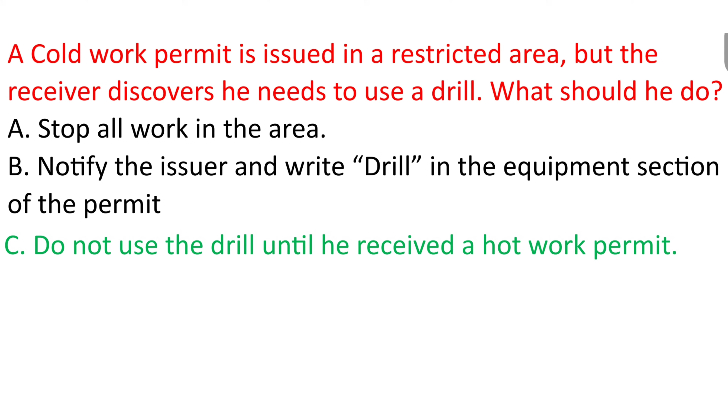Question: a cold work permit is issued in a restricted area, but the receiver discovers he needs to use a drill. What should he do? A. Stop all work in the area. B. Notify the issuer and write drill in the equipment section of the permit. C. Do not use the drill until he receives a hot work permit. Answer: C. Do not use the drill until he receives a hot work permit.

Question: what is a reason for purging? A. Remove non-hazardous materials. B. Clean the line of sludge buildup. C. Remove residual hazardous materials. Answer: C. Remove residual hazardous materials.

Question: when would a receiver need both a hot work and confined space entry permit? A. Working near steam lines. B. Grinding in a storage tank. C. Excavation with a backhoe. D. Driving into a restricted area. Answer: B. Grinding in a storage tank.

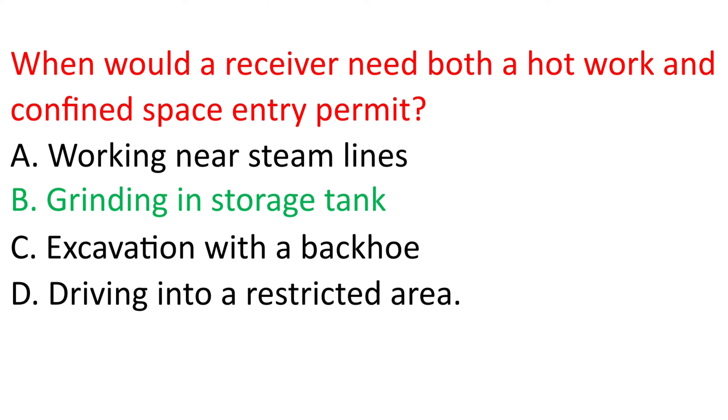Question: welding in a 6 feet excavation, welding in a tank, would require which work permits to be issued? A. Release and confined space entry. B. Hot work and confined space entry. C. Cold work and confined space entry. D. Hot, cold and confined space entry. Answer: B. Hot work and confined space entry.

Question: in what order is a hydrocarbon vessel prepared for an EO/LB? A. Gas test, drain, clean, isolate, ventilate, purge. B. Gas test, isolate, drain, purge, clean, ventilate. C. Drain, isolate, purge, clean, ventilate, gas test. Answer: C. Drain, isolate, purge, clean, ventilate, gas test.

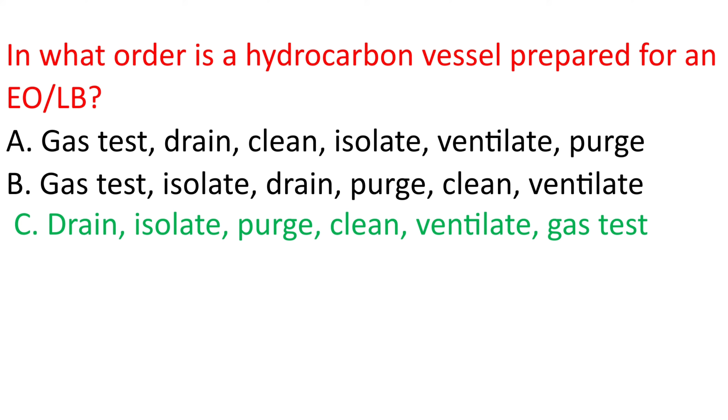Question: in what one way can an issuer inform the workers about hazards in the work site? A. Assign a fire watch. B. Use portable radio. C. Install warning signs. D. Tell the gas tester. Answer: C. Install warning signs.

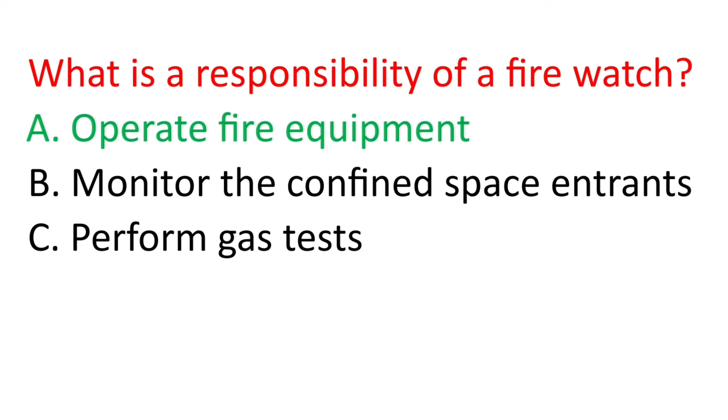Question: what is a responsibility of a fire watch? A. Operate fire equipment. B. Monitor the confined space entrants. C. Perform gas tests. Answer: A. Operate fire equipment.

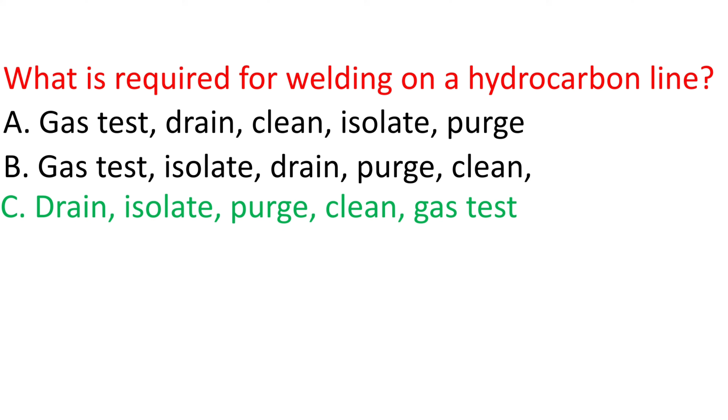Question: what is required for welding on a hydrocarbon line? A. Gas test, drain, clean, isolate, purge. B. Gas test, isolate, drain, purge, clean. C. Drain, isolate, purge, clean, gas test. Answer: C. Drain, isolate, purge, clean, gas test.

Question: why does an issuer ensure that all energy sources have been properly locked out, tagged and de-energized? A. Prevent financial loss of product and power. B. To protect receivers from injury. C. Prevent unexpected exposure to hazardous gases. Answer: C. Prevent unexpected exposure to hazardous gases.

Question: going into a 10 feet deep valve box to tighten a bolt with hand tools requires which type of work permit? A. Hot work and confined space entry. B. Hot work, cold work and release. C. Release and confined space entry. D. Confined space and cold work. Answer: D. Confined space and cold work.

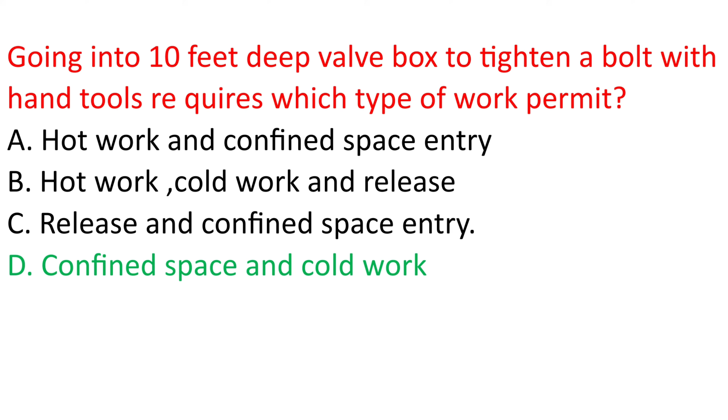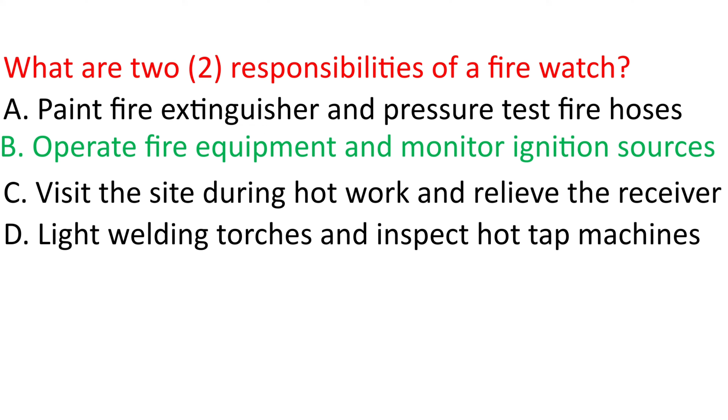Question: what are two responsibilities of a fire watch? A. Paint fire extinguishers and pressure test fire hoses. B. Operate fire equipment and monitor ignition sources. C. Visit the site during hot work and relieve the receiver. D. Light welding torches and inspect hot tap machines. Answer: B. Operate fire equipment and monitor ignition sources.

Question: which of the following requires a confined space entry permit? A. The initial opening of a line containing hydrogen sulfide, H2S. B. Painting inside an office building. C. Sour water lift station. Answer: C. Sour water lift station.

Question: why don't we park vehicles close to the edge of an excavation? A. Toxic gases can fill the excavation. B. The noise can exceed 85 dB. C. The weight could cause a cave-in. Answer: C. The weight could cause a cave-in.

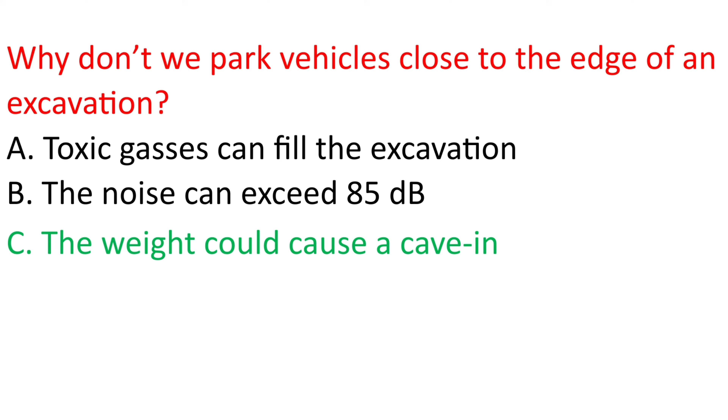Question: why must sewers be covered within 75 feet before issuing a hot work permit? A. To prevent firewater from draining away. B. To protect workers who enter the sewer. C. Flammable gas may be present in the sewer. D. To keep ignition sources inside the sewer. Answer: C. Flammable gas may be present in the sewer.

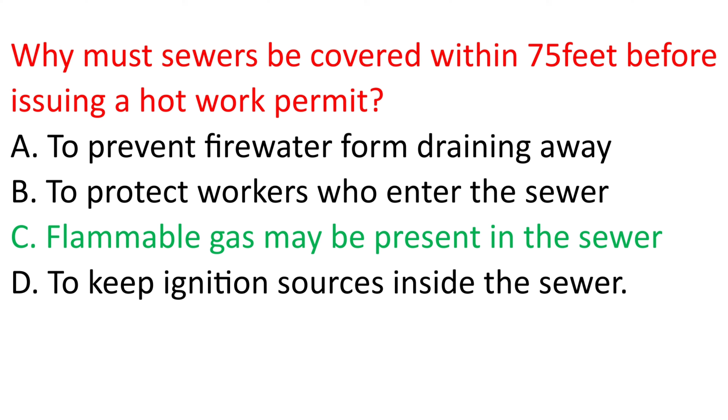Question: an entry permit requires a standby man at the manway for confined space entry, but a qualified standby man is not available. What must the receiver do? A. Enter the space and send someone for another man. B. Enter the space, but explain when he closes the permit. C. Do not sign the permit until a qualified standby man is assigned, and explain why to the issuer. D. Sign the permit. This requirement is not needed.

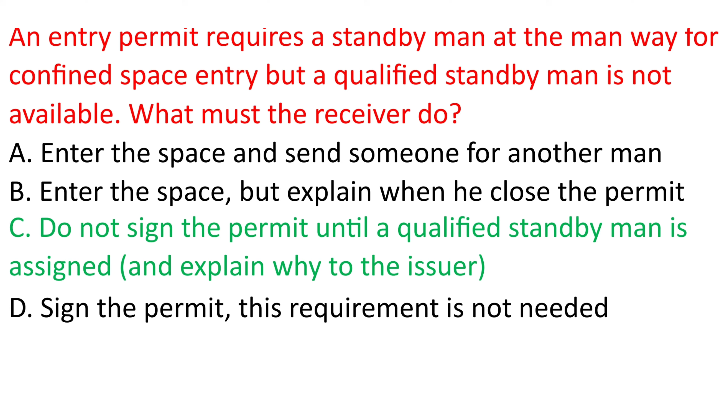Answer: C. Do not sign the permit until a qualified standby man is assigned, and explain why to the issuer.

Question: What is the main difference between hot and cold work permits? A. There is no difference between the two types of work permit. B. Hot work permits are with release permits. C. Cold work permits are not to be used if there are ignition sources. D. Cold work permits allow confined space entry. Answer: C. Cold work permits are not to be used if there are ignition sources.

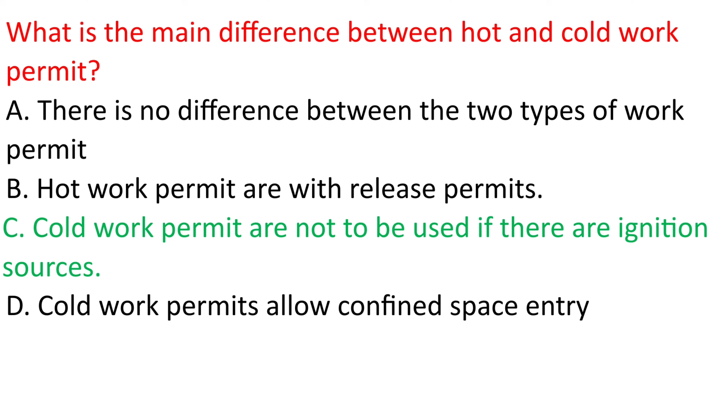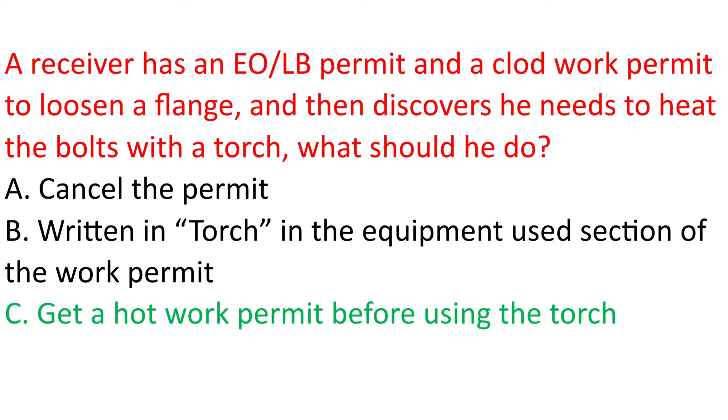Question: What is a consideration for an EO/LB permit? A. Release of flammable and toxic gas, wind direction. B. Isolate fuel source. Eliminate ignition sources. C. Slip, trip and fall hazards. Answer: A. Release of flammable and toxic gas, wind direction.

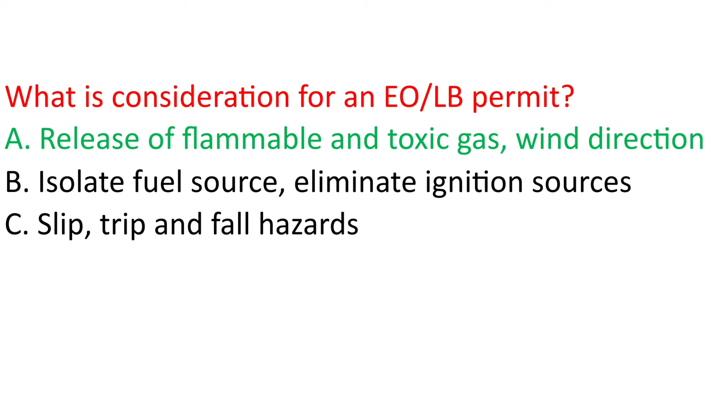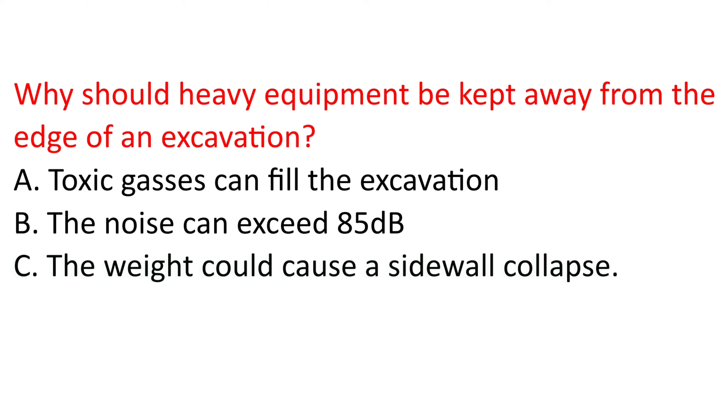Question: Why should heavy equipment be kept away from the edge of an excavation? A. Toxic gases can fill the excavation. B. The noise can exceed 85 dB. C. The weight could cause a sidewall collapse. Answer: C. The weight could cause a sidewall collapse.

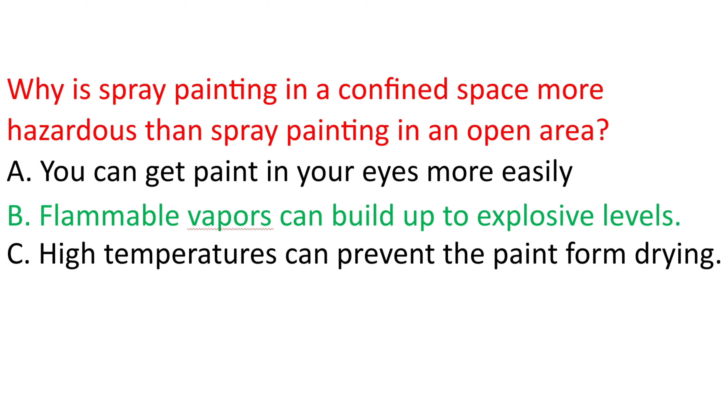Question: Why is spray painting in a confined space more hazardous than spray painting in an open area? A. You can get paint in your eyes more easily. B. Flammable vapors can build up to explosive levels. C. High temperatures can prevent the paint from drying. Answer: B. Flammable vapors can build up to explosive levels.

Question: Who is responsible for safety at the work site? A. Issuer only. B. Receiver only. C. Standby man only. D. Issuer and receiver. Answer: D. Issuer and receiver.

Question: Who must sign the work permit to allow firemen to fight a fire at the work site? A. Division head. B. Issuer. C. Incident commander. D. No one. A permit is not needed. Answer: D. No one. A permit is not needed.

Question: Who must sign an extended duration permit? A. No one. Extended duration permits are not allowed. B. Issuer. C. Receiver only. D. Issuer and receiver division heads. Answer: D. Issuer and receiver division heads.

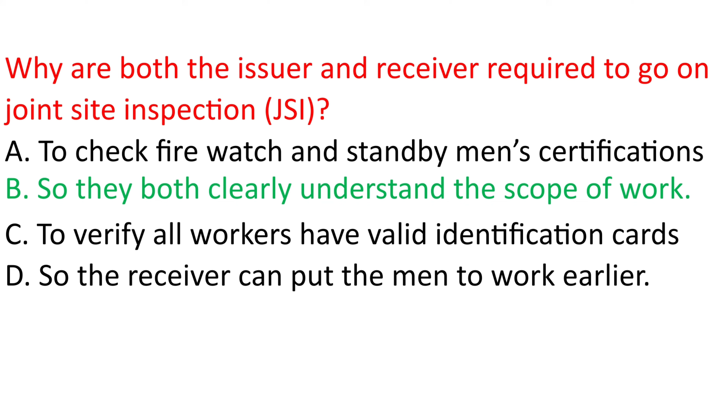Question: Why are both the issuer and receiver required to go on a joint site inspection, JSI? A. To check fire watch and standby men's certifications. B. So they both clearly understand the scope of work. C. To verify all workers have valid identification cards. D. So the receiver can put the men to work earlier. Answer: B. So they both clearly understand the scope of work.

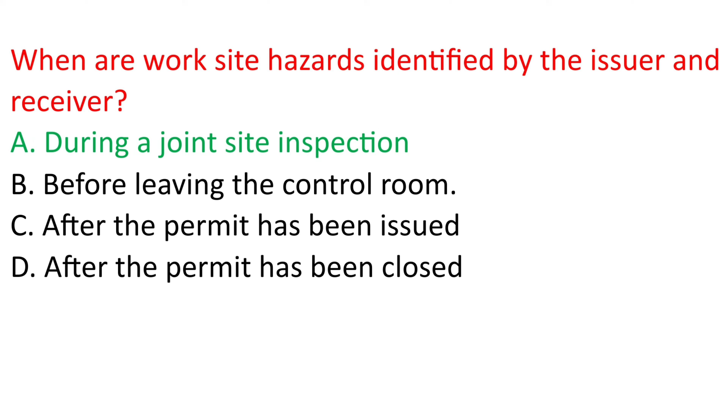Question: When are worksite hazards identified by the issuer and receiver? A. During a joint site inspection. B. Before leaving the control room. C. After the permit has been issued. D. After the permit has been closed. Answer: A. During a joint site inspection.

Question: What is a requirement for a standby man? A. Perform gas tests. B. Monitor possible ignition sources. C. Monitor the work. D. Take permit. Answer: C. Monitor the work.

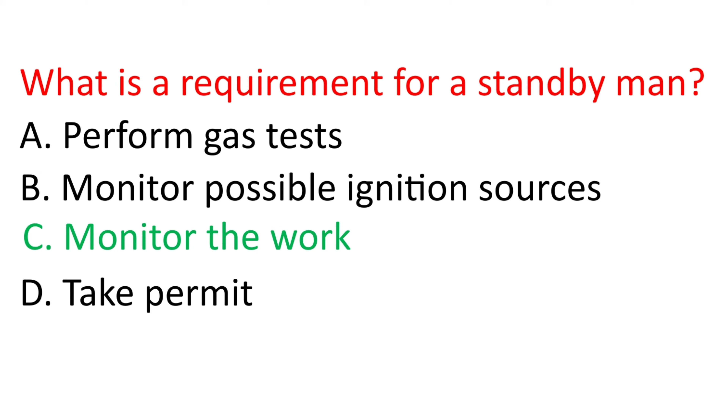Question: What is the issuer's main responsibility? A. Provide plant safety orientation to receivers. B. Train all receivers to receive permits. C. Check receiver certificate and ID card. D. Identify hazards and define precautions. Answer: D. Identify hazards and define precautions.

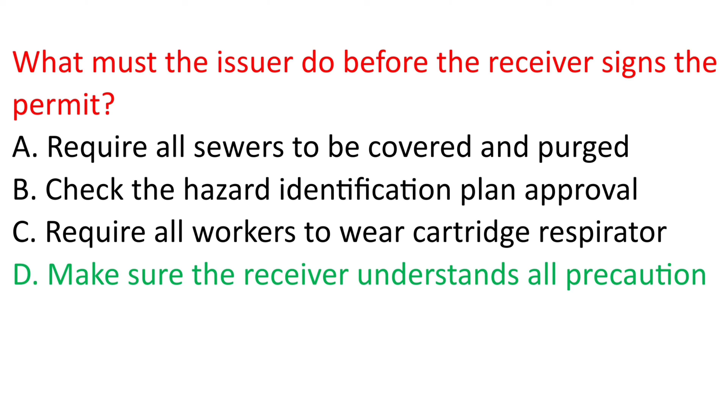Question: What must the issuer do before the receiver signs the permit? A. Require all sewers to be covered and purged. B. Check the hazard identification plan approval. C. Require all workers to wear cartridge respirators. D. Make sure the receiver understands all precautions. Answer: D. Make sure the receiver understands all precautions.

Question: What must the issuer use during a joint site inspection? A. An excavation checklist. B. Nothing. C. A hazard analysis checklist. D. An observation checklist.

Answer: C. A hazard analysis checklist.

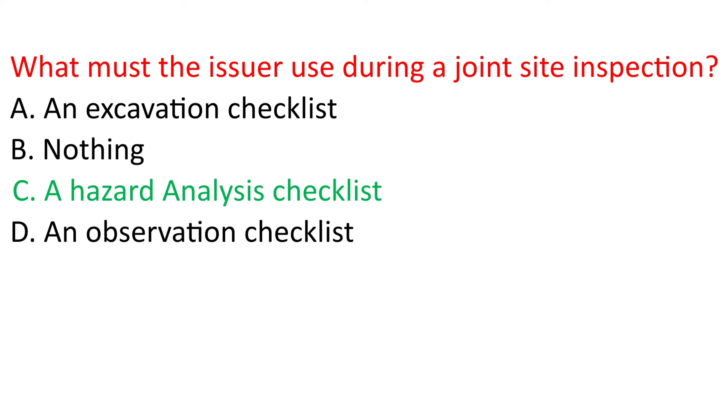Question: What responsibility do issuers and receivers share when signing the work permit? A. Getting countersignatures from superintendents. B. Monitoring the operation of process equipment. C. Maintaining safety conditions at the site. D. Responding to emergency events. Answer: C. Maintaining safety conditions at the site.

Question: Why is the receiver required to sign the work permit and agree to all precautions? A. To ensure the work is done on time. B. To prevent unsafe conditions. C. To document the work starting time. Answer: B. To prevent unsafe conditions.

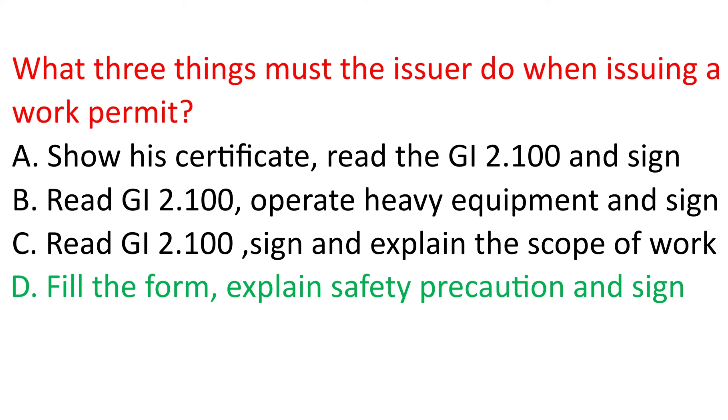Question: What three things must the issuer do when issuing a work permit? A. Show his certificate, read the GI 2.100 and sign. B. Read GI 2.100, operate heavy equipment and sign. C. Read GI 2.100, sign and explain the scope of work. D. Fill the form, explain safety precautions and sign. Answer: D. Fill the form, explain safety precautions and sign.

Question: Who is responsible for reporting incidents in the workplace? A. Issuer. B. Receiver. C. Issuer and receiver. D. Everyone. Answer: D. Everyone.

Question: What does the issuer agree to when signing a work permit? A. To the safety precautions on the work permit. B. That fire extinguishers are required. C. To stay at the site during hot work. D. To visit the site every 2 hours. Answer: A. To the safety precautions on the work permit.

Question: Who obtains all countersignatures for the permit? A. Issuer. B. Receiver. C. Issuer and receiver. D. Standby man. Answer: A. Issuer.

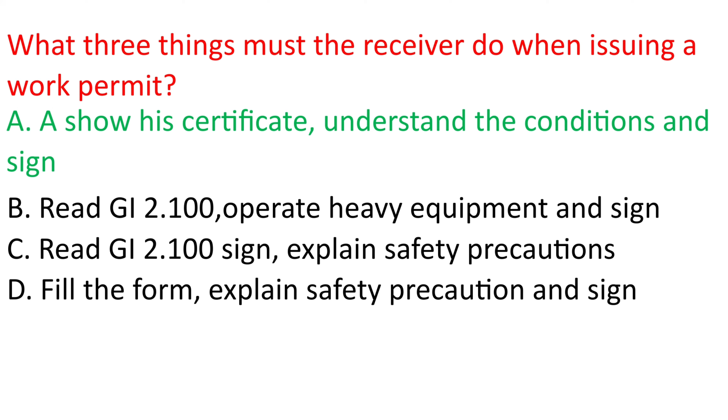Question: What three things must the receiver do when issuing a work permit? A. Show his certificate, understand the conditions and sign. B. Read GI 2.100, operate heavy equipment and sign. C. Read GI 2.100, sign, explain safety precautions. D. Fill the form, explain safety precautions and sign. Answer: A. Show his certificate, understand the conditions and sign.

Question: Who is responsible for obtaining all signatures on the permit? A. Issuer. B. Receiver. C. Issuer and receiver. D. Firewatch. Answer: A. Issuer.

Question: Work starts before a JSI and hazard analysis checklist is completed. What should the receiver do? A. Complete the joint site inspection during the first break. B. Tell his crew to continue while he completes the work permit. C. Stop work immediately and inform the issuer. Answer: C. Stop work immediately and inform the issuer.

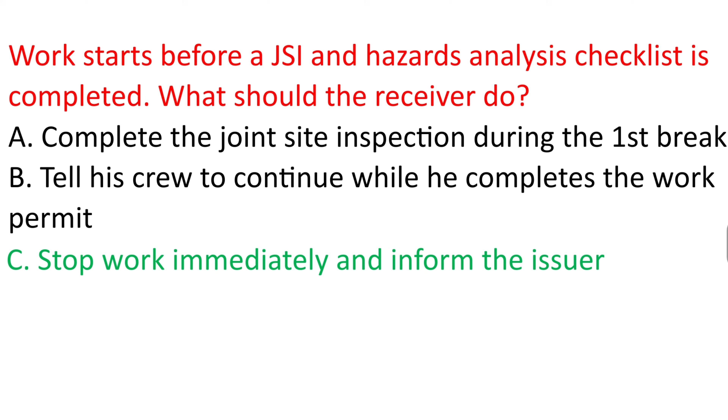Question: What does the issuer or receiver assume when he signs the permit? A. The agreed break times. B. Joint responsibility for the safety at the worksite. C. Non-disclosure of the details of the work. Answer: B. Joint responsibility for the safety at the worksite.

Question: What information does the duration box on the permit give the receiver? A. When he can start and stop work. B. How long the entire job will take to finish. C. How many workers are allowed on the job. D. For how long the permit can be extended. Answer: A. When he can start and stop work.

Question: When can the receiver leave the worksite? A. At the end of his work. B. When the work is complete. C. When another certified receiver is left in charge and the issuer agrees. Answer: C. When another certified receiver is left in charge and the issuer agrees.

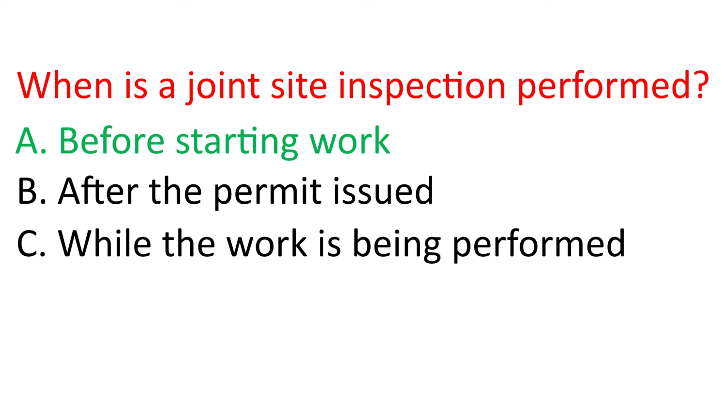Question: What does the issuer identify in Section 2 of the work permit? A. The gas testing results. B. All hazards and precautions for the work. C. The required countersignatures in the work permit. Answer: B. All hazards and precautions for the work.

Question: Why does the issuer ask the receiver what tools and equipment he will use? A. To ensure the receiver is properly trained. B. To complete the security pass. C. To identify hazards and precautions. Answer: C. To identify hazards and precautions.

Question: When are joint site inspections mandatory? A. For all hot, release and entry permits. B. Before issuing any work permit. C. When safety equipment is required. D. When the receiver decides that they are. Answer: B. Before issuing any work permit.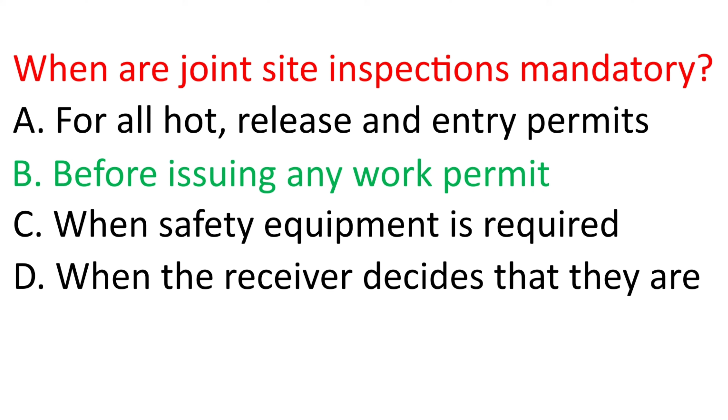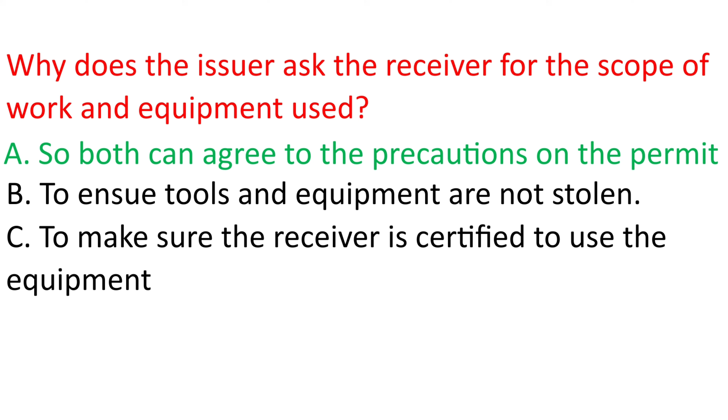Question: What should you do if you discover a crane inspection sticker is not valid? A. See if it is within the 15-day inspection grace period. B. The issuer performs a visual inspection and determines if it is safe to use. C. Do not issue the permit. Answer: C. Do not issue the permit.

Question: A receiver does not understand a precaution on a work permit. What should he do? A. Instruct his work crew to begin while he gets clarification. B. Contact Loss Prevention Department for clarification. C. Ask the issuer to explain.

Answer: C. Ask the issuer to explain.

Question: What is the main purpose of the site inspection? A. To identify how many men are on the job. B. To check site safety after work starts. C. To identify hazards and define precautions. D. To check certificates and respirators. Answer: C. To identify hazards and define precautions.

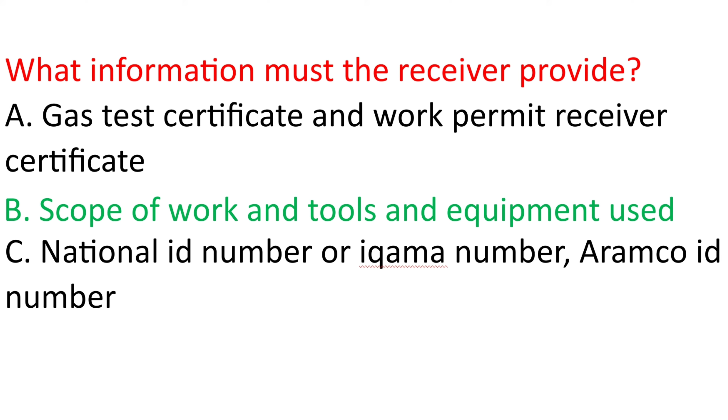Question: For spray painting inside a confined space, Section 2 indicates respiratory equipment is needed but none is available. What should the issuer and receiver do? A. Open the permit and send someone to get it. B. Cancel the work. C. Do not sign the hazard analysis checklist and do not allow work to begin. Answer: C. Do not sign the hazard analysis checklist and do not allow work to begin.

Question: When is a work permit considered renewed? A. When the permit is closed. B. When the issuer and receiver review the permit and sign. C. When the gas tester signs the permit. Answer: B. When the issuer and receiver review the permit and sign.

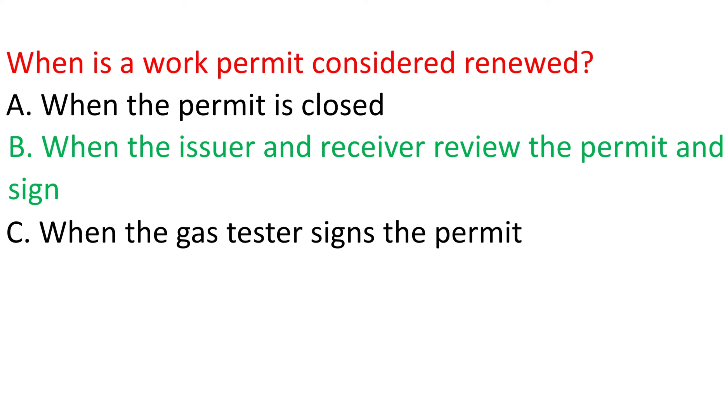Question: How does a receiver get a hot work permit renewed? A. Tells the issuer and both must sign the permit. B. He signs the permit and tells the issuer later. C. Tells his supervisor and continues working. D. It is renewed at the restricted access office. Answer: A. Tells the issuer and both must sign the permit.

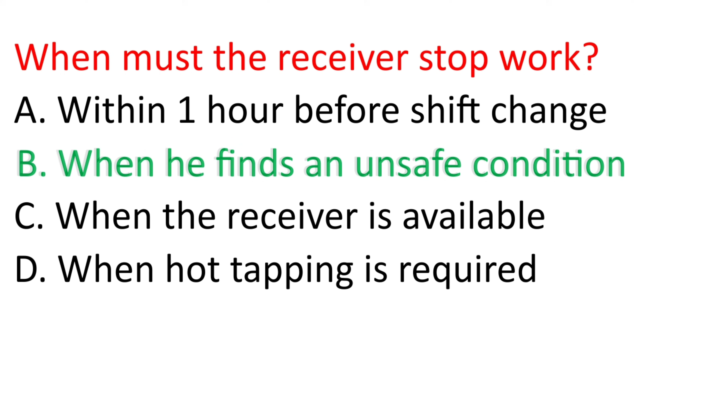Question: When must the receiver stop work? A. Within 1 hour before shift change. B. When he finds an unsafe condition. C. When the receiver is available. D. When hot tapping is required. Answer: B. When he finds an unsafe condition.

Question: The requirement to wear a respirator and have a fire extinguisher at the work site are examples of what? A. Precautions that must be taken for all types of work. B. Decisions the receiver must make by himself. C. Conditions for all confined space entry work. D. Precautions the issuer would state on the work permit. Answer: D. Precautions the issuer would state on the work permit.

Question: The receiver must leave the job site and has received the issuer's permission. What must he do before he leaves? A. Give the permit to the issuer until he returns. B. Close the permit, but keep the men working. C. Give the permit to a certified craftsman, another receiver, until he returns. D. Keep the permit with him, but tell a coworker. Answer: C. Give the permit to a certified craftsman, another receiver, until he returns.

Question: What must the receiver do with the permit before starting work? A. Leave the permit with the issuer or his supervisor. B. Keep the permit in his possession or post it at the job site. C. Post the permit outside the control room. D. Give the work permit to his immediate supervisor. Answer: B. Keep the permit in his possession or post it at the job site.